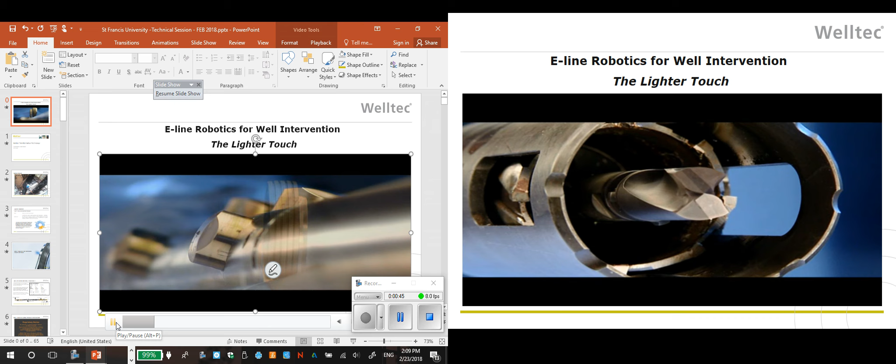So Welltec's a privately owned company. I don't really need it that much, I'll just move around a lot, they'll be able to see around me.

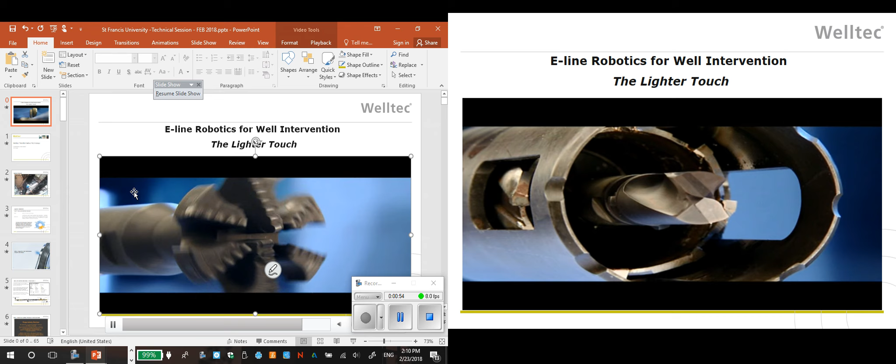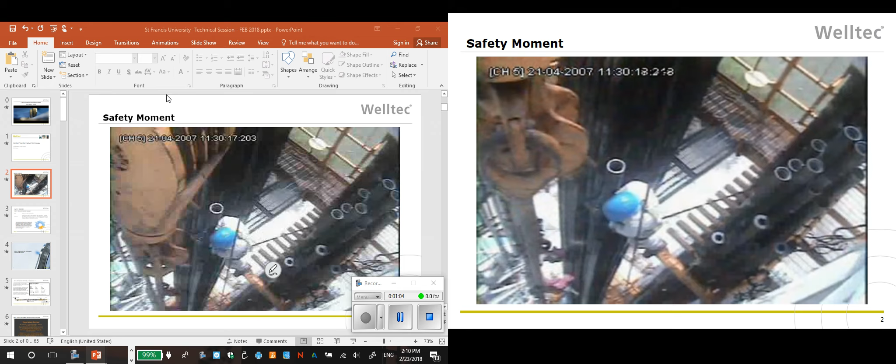Alright, so we like to start everything off with a safety moment. Essentially what this is showing is exactly what you never want to do. This guy was up on the monkey boards of a rig, he's not even using his lifting harness. He's literally on the verge of dying right there. He probably fell asleep from a long shift. Luckily he was not a big old boy like me, so he was able to hold on real tight to the traveling block there and not manage to fall to his death. He lived through this, by the way.

But the point of all this is that safety and environmentalism is paramount within the industry. Whenever you first go to work, wherever it is that you're going to end up working, the first thing you're going to do is undergo safety training.

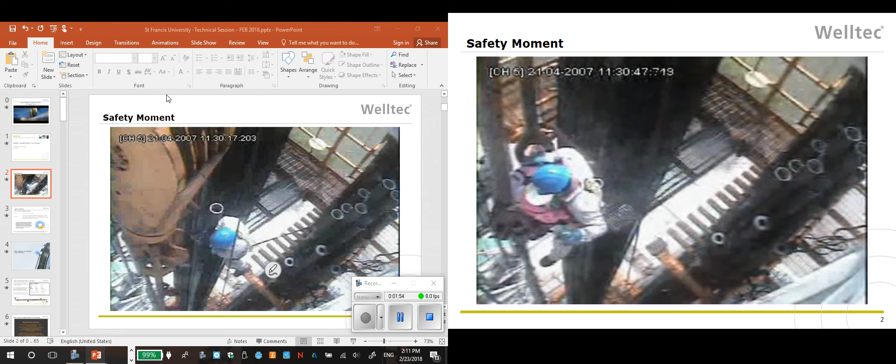I started out at one of the largest oil field companies in the world, Schlumberger. The first thing they do is they send you to a school and train you how to drive again, because car accidents, motor vehicle accidents, were the number one cause of death for all the employees worldwide.

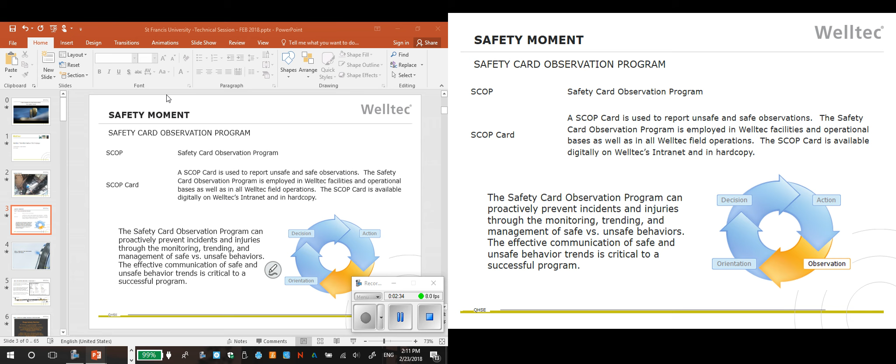So most companies have a safety program. The biggest trend in the industry is everything's a behavior-based safety program. So they don't want you to just make a checklist and check it off and say I did my safety checklist. They want you to modify your working lifestyle to be thinking in terms of safety, and it works, because all the safety principles are based on the fact that nobody ever thinks an accident's going to happen. That's why they're called accidents, and it's too late to be prepared once it does happen. It gets ingrained in you, and they want to develop a culture of safety within the industry.

The traditional way of doing things is you would take a 40-foot joint of pipe, put one pipe in the side of the other, push it down, put another 40-foot joint on, push it down, 40 feet at a time for up to 30,000 feet. It takes days.

Then people invented coil tubing. Coil tubing you can run in hole, it's a continuous reel of tubing that you can run in hole at 100, 200 feet per minute. That sped things up, but it's very heavy, with a lot of heavy lifting involved and a lot of fluids required.

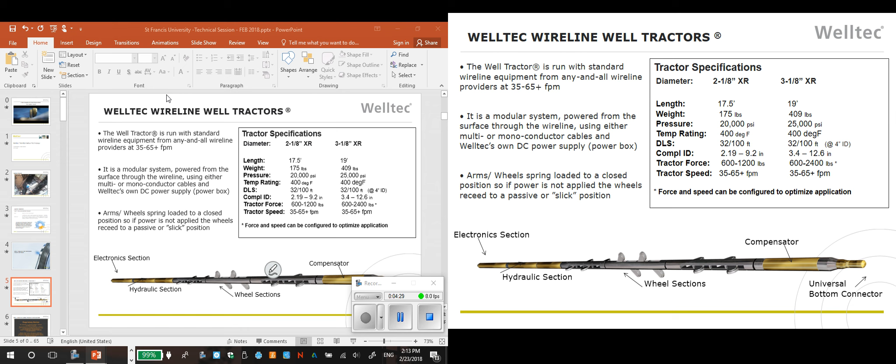And we attach the wireline tools at the end, and we push perforating guns, logging tools, microseismic arrays, pipe recovery tools, anything out into the lateral, all off a wireline. The advantage of that is it's safer, easier, faster, and usually more cost-effective than the old traditional way of doing things.

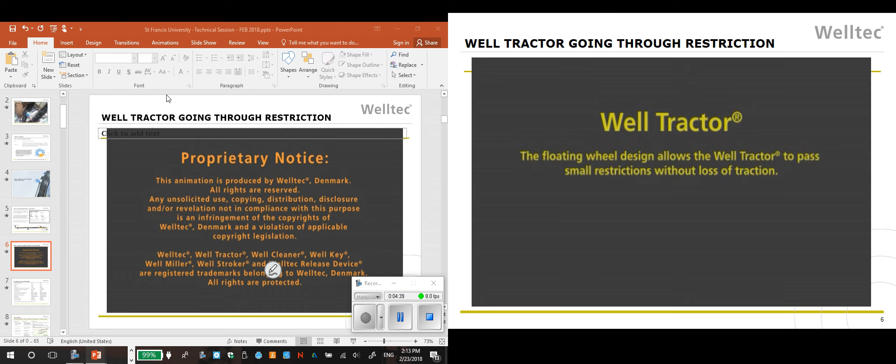This is a video that shows a well tractor, how it operates, going through a restriction in the well. The tool is designed so that if you have different size casings, patches in the well, any kind of anomaly, the tractor can navigate that and not get hung up, which is one of the largest issues in the industry, losing something in somebody's well. There's millions and millions of dollars on the line, and people tend to get very upset over these types of issues.

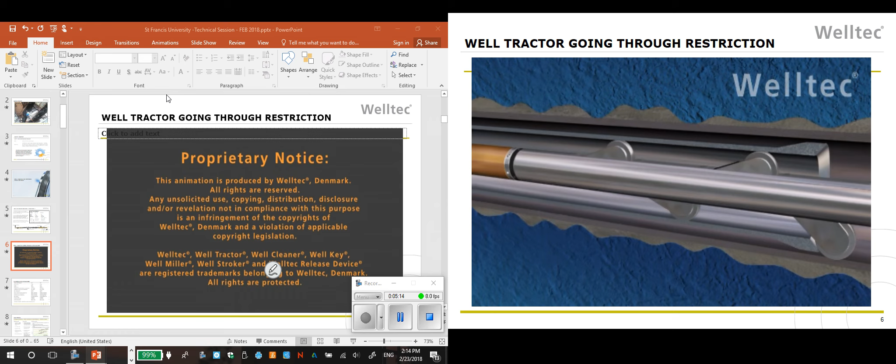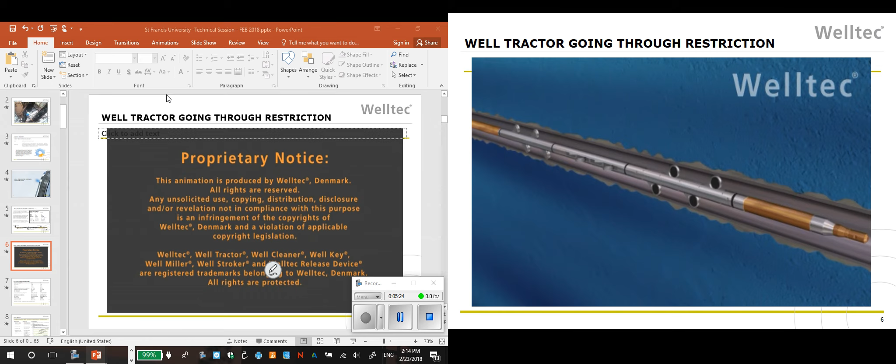So you lose something in the well, you've got to go fishing for it. It's not always that easy. If you work in the industry long enough, whether it's on a frac site, a drilling rig, or whatever the situation is, you are literally going to witness the impossible occur. It happens daily. It's never supposed to happen, it shouldn't happen, but we just saw it happen right here and now.

So these are the specifications for our newest generation of well tractor. We're owned by one guy in Copenhagen, Denmark. He's a geoscientist by training.

He was working offshore, helping people develop ways to pull these tubes, coil tubing uphill with fluid. He said there's got to be a way to do this off of this electric wire line. He created the robotic well tractor. Statoil saw it up front, gave him about $6 million of startup money and brought in a manufacturing firm. He developed it, and the first generation could only do about 20 feet per minute.

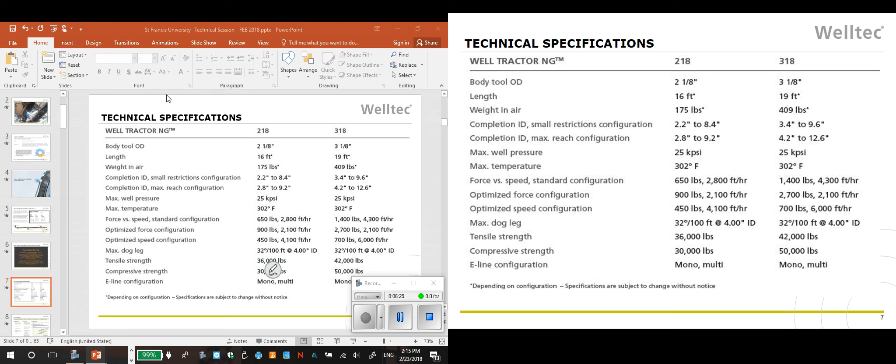We're on our third generation of well tractor right now. We can do around up to 70 feet per minute. Our newest generation, running in the North Sea right now going through its paces, is a little bit smaller and faster, and it can go up to 100 to 120 feet per minute, which is a pretty large step up, getting much more competitive with coil tubing and its speed.

This is a case story showing the largest, deepest well and the longest lateral we've been in locally in the Northeast. This is in the Utica well. It's just under a 24,000 foot well with an over 13,600 foot lateral. We conveyed 5 guns and a plug to the second stage in the well because they couldn't pump into that, and we conveyed it across the 13,000 foot lateral without issue.

As an industry, it used to be that people only drilled wells that were 12,500 feet deep with a 5,000 foot lateral. That's nothing anymore. Everybody's drilling out 18, 20, 25,000 feet. Right now in the Northeast, people are drilling 30,000 foot wells. Everybody's trying to beat Eclipse Resources and their longest wells ever drilled on land operations.

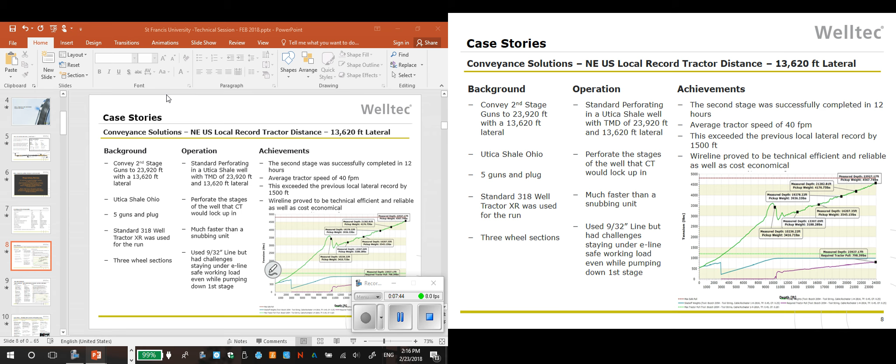So there are challenges involved, such as everybody uses 9/32 wire line. That is too light right now. As you get out to 25,000 feet, just the natural weight of the wire line and the tools itself, you're compromising the safe working load of that wire line. People are ultimately going to have to size up the size of the wire line.

But at any rate, the world record lateral distance for our technology, the well tractor, occurred in the United Arab Emirates. It was a well with a 19,596 foot lateral and a 27,700 foot MD, measured depth, the total distance that it goes. So we were able to convey a 136 foot long production logging tool string.

We did have to use a tandem tractor setup. Our standard tractor has one motor that can generate 1,000, 1,200, 1,400 pounds of pulling force. We can use a second motor to get more power and force out of that and generate up to 2,200 pounds of pulling force. A tandem well tractor was used on this to deliver those tools to that depth because you needed a larger wire line, 5/16 wire line, which is much larger and heavier.

This is a representation of drag modeling that we have. So we have a MATLAB-based drag model that basically forecasts how feasible the job is with our technology.

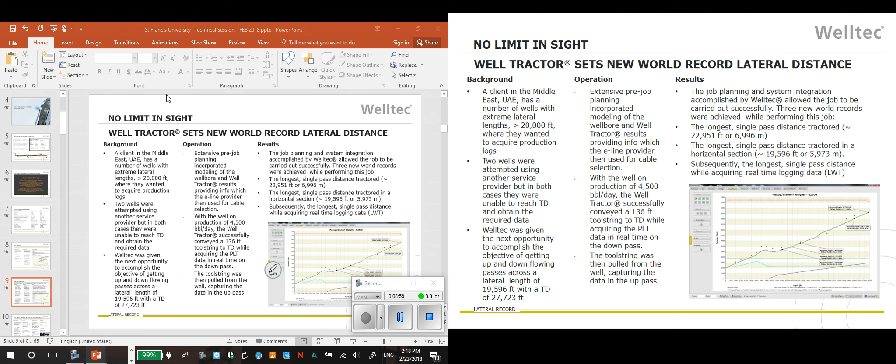Because the big thing within the industry is if you want to stay in business, you never show up on location and say, we can't do this job. That's impossible, we can't do it. They don't like to hear that. You wasted everyone's time and money. You'll never work for that company again for a long time.

So you have to be able to go out there. And even as a salesperson, one of the first things you learn as a sales guy is don't lie. Never lie. If you lie, they will never trust you again the rest of their life. You can have a great relationship with someone for 5 to 10 years, you tell them one lie and it's over, and they'll never trust you again. So the industry is all about transparency, being upfront.

If you can do the work, come out here and do it. If you can't do the work, don't jerk me around, tell me you can't do it. We'll find another way to do it, and nobody gets any hurt feelings. So that's why everybody has job modeling.

This particular operation was a classic situation of what's never supposed to happen. The simple mistake was this particular well operator got the names on their wells confused. One well is 20,000 feet deep, one's 17,000 feet deep. They named the one that's 17,000 feet deep as the one that's supposed to be 20,000 feet deep. They got it confused, and lo and behold, they go out and start fracturing this well.

After they start getting into the zipper frac on this well, they realize there's a problem. So we actually ran a camera logging tool to help determine it's just a naming convention issue - we're in a different well than we thought we were.

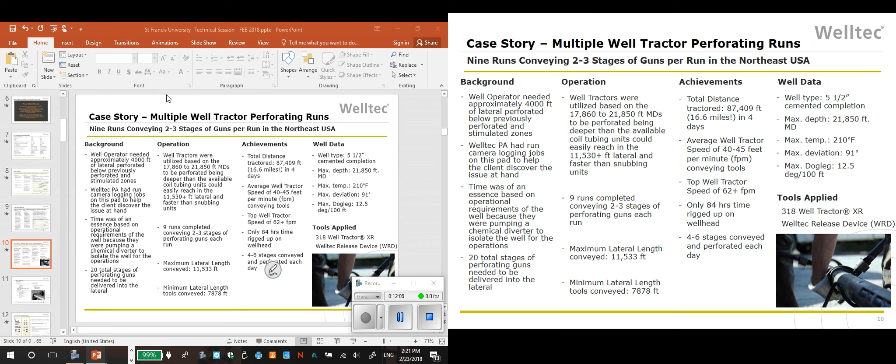We ran nine runs over the course of under 4 days, and it really only took 4 days because they had other operations going on between our runs. We conveyed 88,000 feet in the 9 runs, nearly 17 miles, in under 4 days. We could have easily done it in about 2 days for that distance. So it was all good, very impressive.

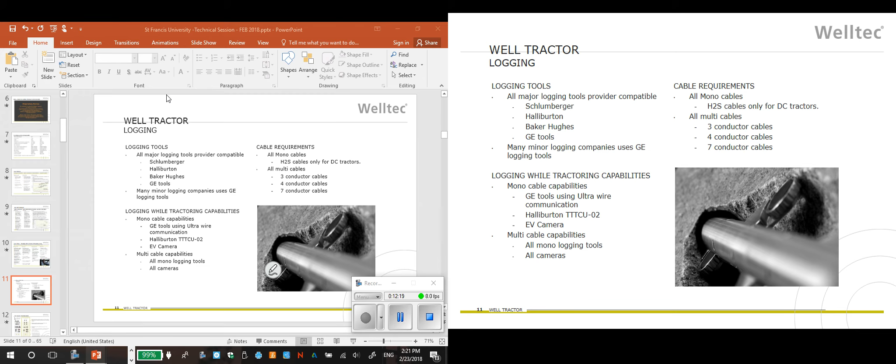Operations in general - whenever we were getting involved in this project, half of the engineers in the room for this operator were like, you guys are nuts, it's not going to work. It's just a tractor, good for 1 or 2 runs. I'm not sure we can go out here and make 10 or 12 runs. But we had done it before - we had some case stories, so it's not the first time.

The advantage of a tractor is, and it really is revolutionary technology - the owner of our company is forward thinking in every way. I was explaining this to the professors earlier - the guy who owns our company has been offered hundreds of millions of dollars to sell out by every major oil field service company you've ever heard of. He's laughed at them, refused it, and walked out the door because he's got other inventions.

This is our oldest technology we're talking about. The newest technology we have is even more revolutionary, and some of the stuff they don't even tell guys like me because they're very secretive about their technology.

But the value proposition is that a coiled tubing unit is a very large, heavy piece of equipment. We deliver our equipment on one pickup truck with a tow-behind generator. The tool weighs around 400 pounds, 17 feet long. So you need a wireline truck and a pickup truck, that's it.

A coiled tubing unit is a semi with a giant spool of coiled tubing the size of half of this room - a drum 10 feet in diameter, wrapped with 30,000 pounds of coiled tubing or more. So you have that semi plus 3 other support semis. To get coiled tubing out on location you're talking 4 semis, a huge footprint on location. We can do the same work off of a pickup truck and wireline unit, so that's very advantageous for various different reasons.

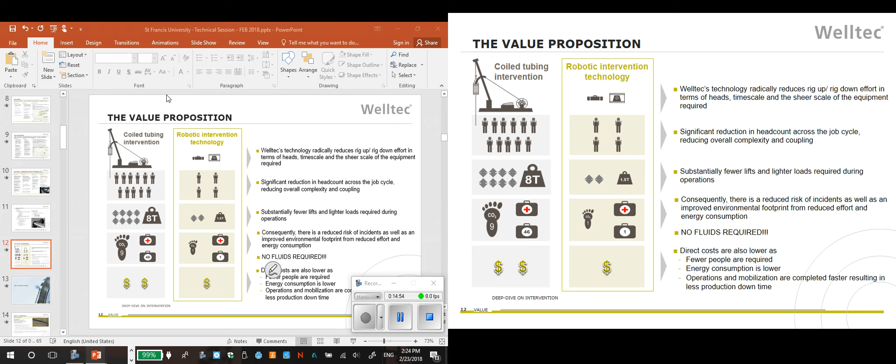We require zero water to do our operations. When you're doing a coiled tubing operation, you're using sometimes millions of gallons of water to clean out a well. We can go clean out the same amount of debris using zero water.

And that's where we're getting into the cleaning tools. This is a representation of our power suction tool, the PST tool. Basically, the way it works out is, if you've ever worked around any oilfield stuff, there are things called cement dump bailers where you run in and dump stuff out of the tool into the well. This works opposite.

We have a pump inside the tool. It creates a vacuum, a Venturi effect, circulating fluid through that tool, and we suction debris into our tool, and then we can hold it in there.

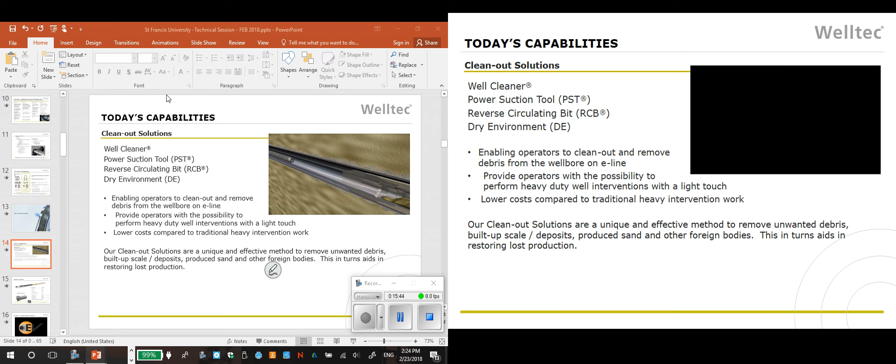This is an advantage—it's a small volume cleaning solution, but it's an advantage over some operations because we can deliver the material directly back to the surface. We have tools that have a bit on the end like this that can mill and vacuum-suction the debris in. This is all very small volume cleaning work.

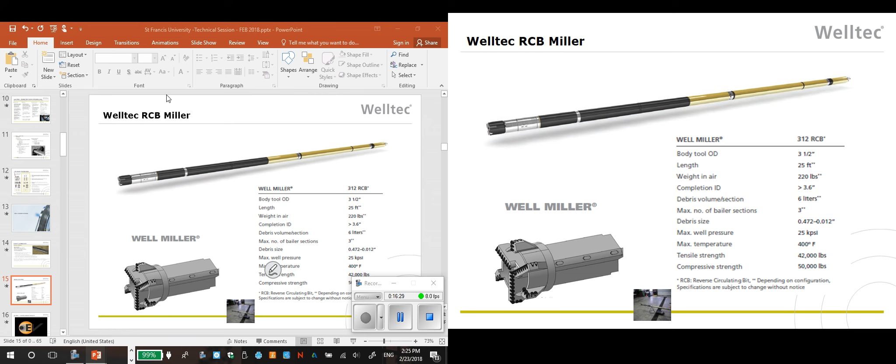Now, this is where the nuance comes in. We can't go out and do everything coil tubing and these other heavier weight operations do. We're never going to claim that we can. We can't go out and effectively clean 1,500 feet of sand in a lateral—it's going to take a long time. So in those operations, coil tubing, or stick pipe as they call it, just regular tubing, is generally much more beneficial. But the next video shows a slide of a well that was cleaned out with coil tubing.

So we'll see if we can get the volume going here. The wellbore fluids were a mix of produced oil, produced water, and frac water. So let me...

Yes, so this was a well that was cleaned with coil tubing. This was a camera run on coil tubing after coil tubing had already cleaned the well, and you can see that there's a great deal of debris still left in the well.

Our technology has the option to clean a lot of this out, because it's really funny—you have coil tubing guys who are like, okay, I'm going to go out there, use coil tubing, and make your well squeaky clean. There's not going to be a drop of dirt left in your well, that's what a coil tubing salesman will tell somebody.

And then, interestingly enough, two days later, the exact same coil tubing salesman will tell somebody, we couldn't possibly pump enough rate through our coil tubing to clean everything out of the well. That's why there's still stuff there. So at any rate, what you find is that everything's not an exact science. There's limitations to what everything can do.

For example, a coil tubing unit is only 2 inches in diameter—the ID is actually going to be like 1 3/4 inches or so. So you can't pump enough fluid through there fast enough to bring everything back up out of the well. You're going to have something left in the well.

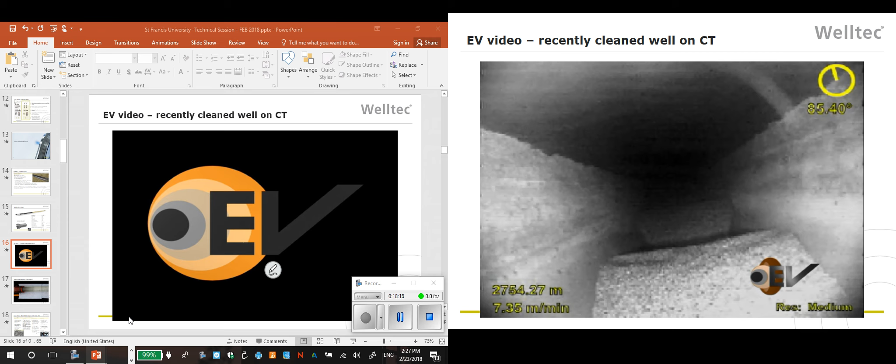But our tool—the next video is a test loop of ours done in Norway. If anybody speaks Norwegian, let me know what these guys are saying. It shows the power of our tool, vacuum suctioning. Basically, we did this to prove to clients that it works.

They put a bunch of gravel, rocks, all kinds of stuff in the bottom of this test loop. We've got our tool going through—some of these rocks are 1 inch, 1.5 inches in diameter. We just vacuum-suction it up in there.

They were saying stop there. I figured that one out, by the way.

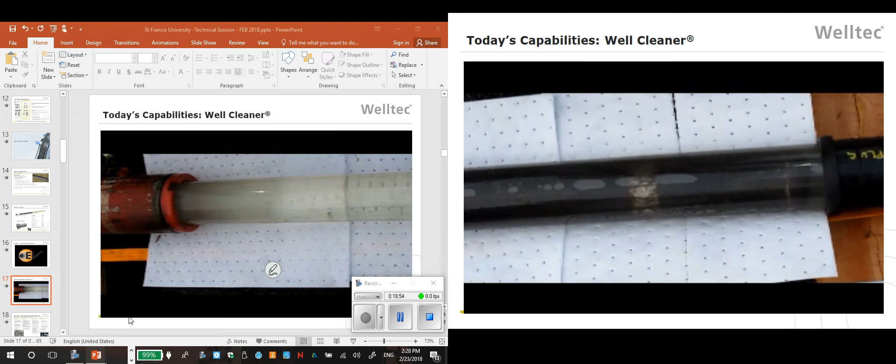Interestingly enough, this is one of the technologies that when I first started working for Welltec in 2010, selling in the Pittsburgh area, I had people tell me, you're nuts. There's no way on earth we would ever use that. And that lasted until about 4 years ago.

When people first started drilling out past 18,000 feet over in the Utica Shale, for whatever reason, they designed a well in such a way they were counting on the toe sleeve and a pressure actuated toe sleeve to be able to pump tools down. Because as you guys have probably been told, until the well's open and you can start pumping stuff down, you're limited. You have to push it down with coil tubing or pipe or whatever, right?

So at any rate, this particular operator, the toe sleeve didn't open, they couldn't get tools down. Coil tubing couldn't get through the lateral length and the depth. It would just lock up and never get there. A snubbing unit would be very expensive, take a long time, this type of thing. So we were the primary contingency and we were able to go in.

First well, we just ran in with our well tractor. We shot the guns on the first stage. Everybody's happy. They're able to pump in later, start to frack. The second well, we tagged cement, junk cement, 4,000 feet high in the lateral.

We pulled back out, ran back in with our milling tool, and in one run with the milling tool, we were able to clear 3,000 lateral feet. Now that doesn't mean that we cleaned 3,000 solid feet of cement into our little tiny tool. That's impossible. But what you find is sometimes you just have a hump.

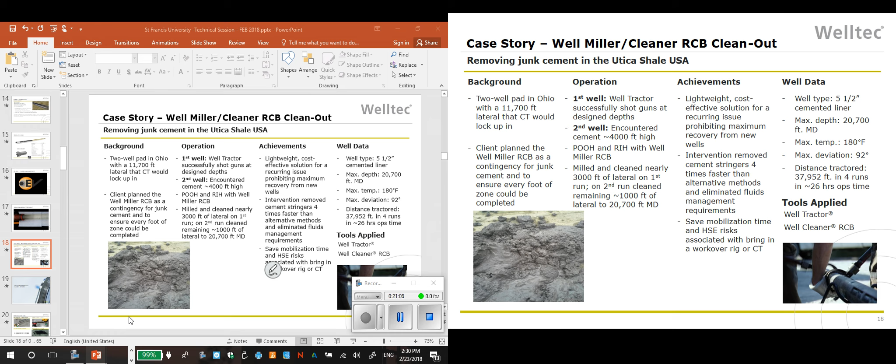If you did the same amount of runs with a snub unit or a stick pipe, as they call it, it would feasibly take you 4 days. And we were able to do it in just over 1 day. So they were thrilled about it. We were able to reduce their operations. So something that's really going to be working out here and has kind of a local effect to it

is we also have what we call a dry environment cleaning tool, meaning that the vacuum suction tools I've shown you at this point, it needs a pipe full of fluid to create the vacuum suctioning effect to pull the debris in, right? There are a lot of dry gas wells out there that have zero fluid in them, and they don't want any fluid on them, right?

As a matter of fact, up in northeastern PA, they have these old dry gas wells that were horizontal wells drilled from 2008 to 2012 time period. They want to clean those out to get the produced sand and scale out of them and get more production out of them. It doesn't make a difference how much fluid they pump into it.

The formation is going to take every drop of fluid, and they're never going to get anything come back to the surface. They could pump a bazillion barrels of fluid into that. It's going to take it all, but they still want to clean it. So we, luckily enough, have a mechanical solution that can go in and mechanically clean all this produced sand and scale out with zero water, all right?

So one of the biggest concerns that people have whenever you're dealing with urban drilling like you have around Pittsburgh and things like that, right? It's one thing whenever you're drilling a well 1,000 miles out in the middle of the desert and there's nobody around to see it. It's another thing when you're driving right through everybody's farm and backyard and all that stuff, right? So we reduced the heavy vehicle traffic.

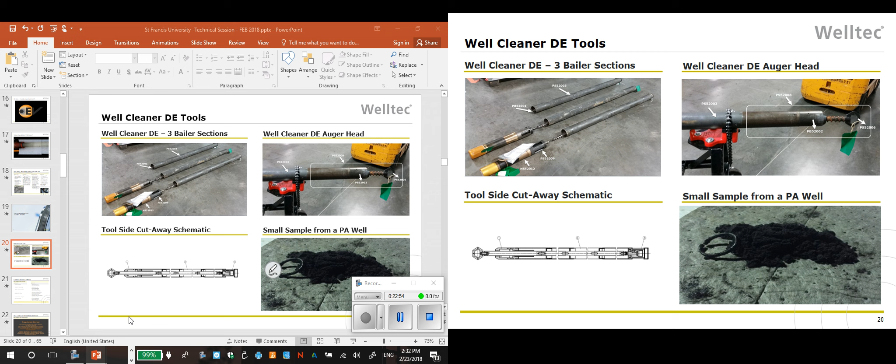So we're able to go up to northeastern PA, clean this produced sand. We also find O-rings and rubber gaskets and parts of plugs and things left over from the frack in there. And we mechanically clean this sand and produced shale back out of the well, saving them millions of barrels of water, all the heavy vehicle traffic, the cost, the risk associated with it, which is a big deal.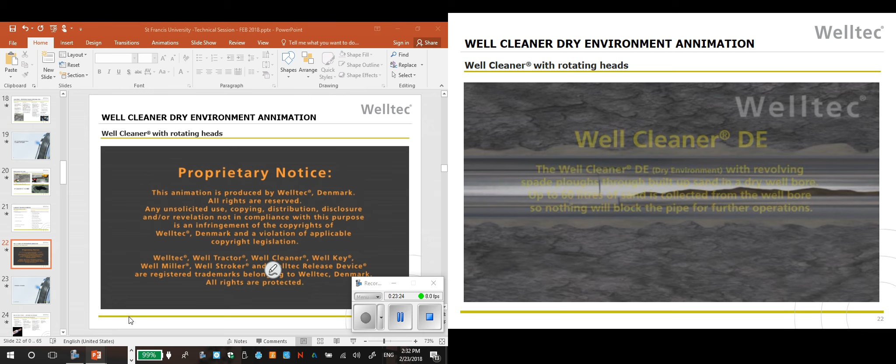This is something we got into just last year, and it all came up by accident. I was at the client's office in Pittsburgh. We were talking about something completely different, and they were explaining to me they have this problem. And I said, hey, this problem you have, not being able to circulate fluid back to the surface, we've got a mechanical solution for it.

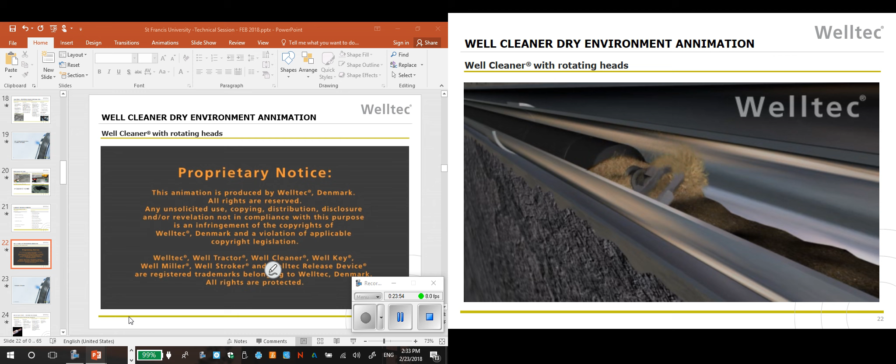It segued into us helping them save millions of barrels of water and heavy traffic and all this. We'll ultimately write an SPE paper about it.

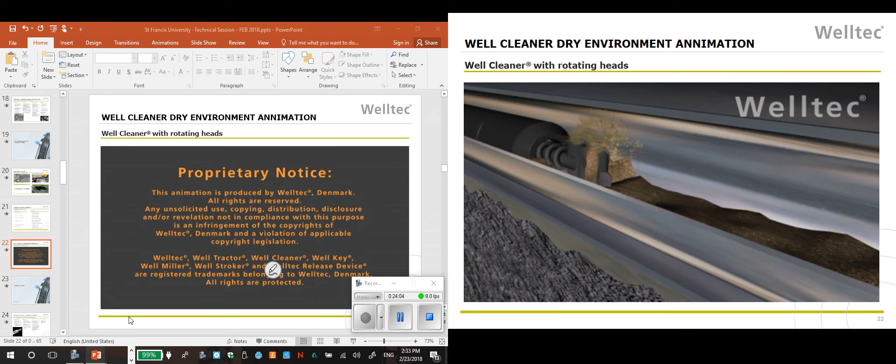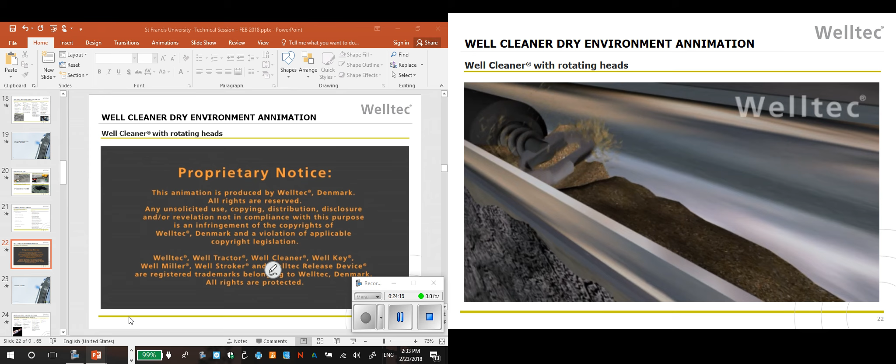We went back and made some design modifications for our tool. This is the way the tool was originally driven—it had this paddle system and auger, and it worked. It was effective, but we all wanted a little bit more out of it. So we redesigned the front end of the tool, and that's where the mechanical engineering experience came in, to work with the client and custom redesign the front end to best suit the particular operation.

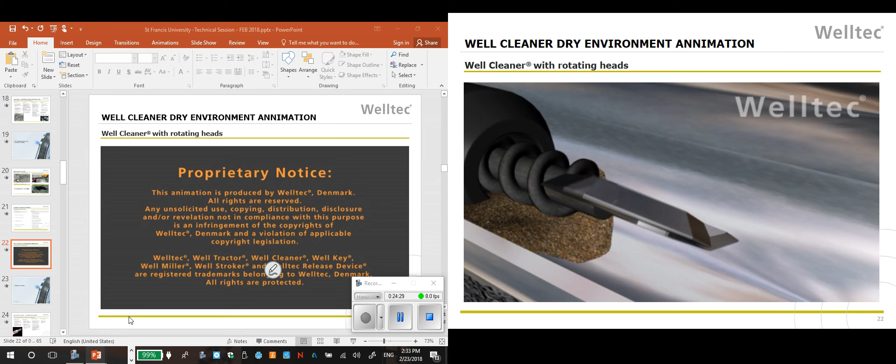That's one of the coolest things about working for a small company like Welltec—our owner has his little mad scientist manufacturing facility off to the side of all the main manufacturing facilities in Denmark. And we custom build tools regularly.

So people come to us with a problem. They say, we've got this problem, we want zero explosives on our platform because there's a bunch of pressure, we're afraid something's going to blow up. We create a solution that's all mechanical, no explosives involved. So we can also go in and fish.

Fishing is a very big deal, as mentioned. If you lose something down in somebody's well, millions of dollars are on the line, and they want to get it out. People lose everything from bolts, gloves, pipe wrenches. Our tools occasionally get pulled off, the wire line breaks, and then you have to go fishing for the tool.

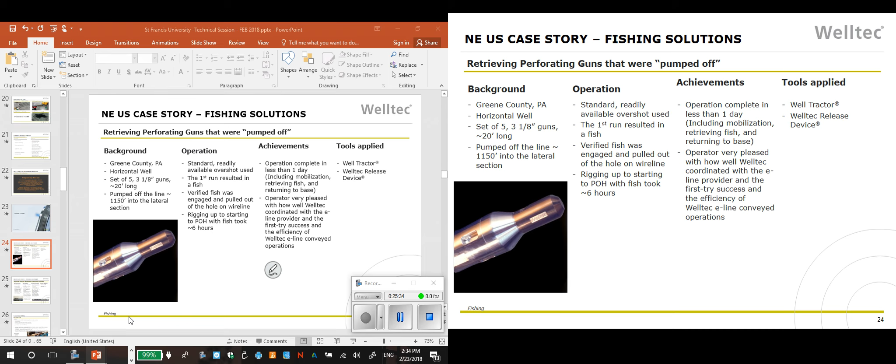We can actually fish our own tools, but we can also fish perforating guns. We've been able to fish perforating guns out of the well, tractor in, latch into those, and pull them out much more quickly than some other operations. If you were to do that on stick pipe, it would be a much more involved process.

They lost it. Now some people just say, I'm leaving it down there, we'll pump it down to the bottom of the well and forget about it. But Shell's not one of those companies. They decided they wanted to get this out. You would typically try to pump a tool down to latch into it, but they couldn't do that in this case because they were running these flow-through plugs—if they pumped this back through the flow-through plug, they would never get it out.

Kind of a long story, maybe too many details to get into. But at any rate, we were able to go in and use an electromagnetic fishing tool to tractor in and latch into this little tiny tool with a coiled tubing unit. If you touch this with a coiled tubing unit, you're not even going to notice it—you'll never notice that it's attached whatsoever. We're able to get a slight tension response, and surprisingly enough, we were able to pull this out in one run.

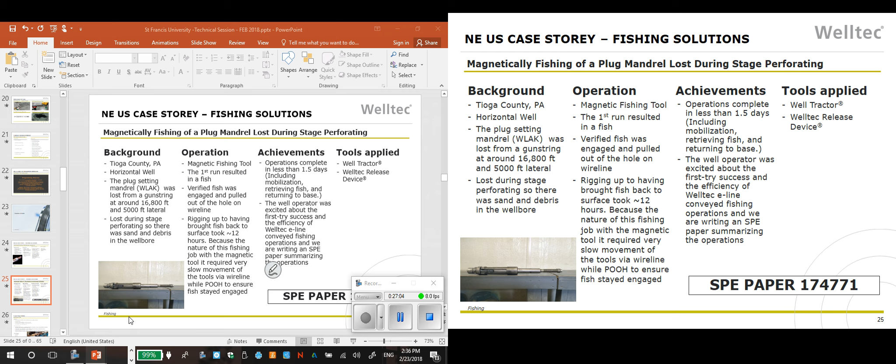So we tractored in, latched into it, and pulled it out in one run, going very slowly, around 30 to 50 feet per minute on the way out. If you would have asked us beforehand, we would have said it would take at least 3 runs. We were able to do it in the first run. Pretty cool SPE paper about it.

Now, we've won different awards, specifically with this event called ICOTA, the Intervention and Coiled Tubing Association. We've won a bunch of awards for them, specifically for the well cutter tool.

This is one of those custom designed tools. Somebody came to us, they wanted to cut a bunch of pipe on an offshore platform in Russia. They wanted zero explosives on the platform.

We created a way to do it, because ordinarily the way you cut pipe is you just put a shape charge in there and blow it in half using explosives. It's the easiest, fastest, simplest way to do it. Been doing it for decades, right? But it's a very violent process, very risky, and does damage to the steel. So we created the well cutter tool.

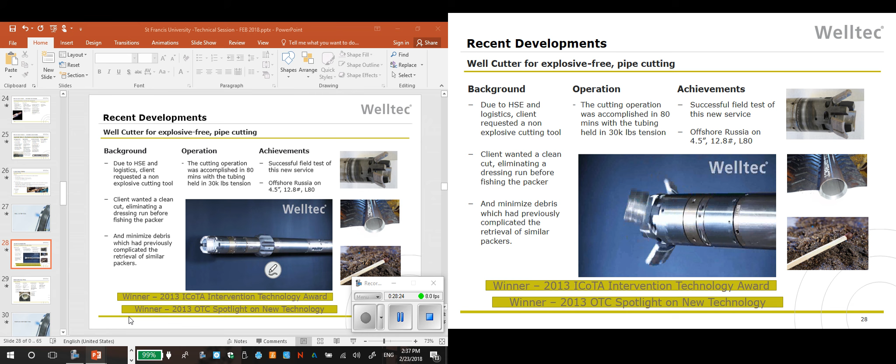So it centralizes itself in the pipe. Then these arms come out, and this is like a special composite alloy that's diamond embedded, some kind of secret something, right? That basically comes out and grinds the steel in half.

The driller's like this because whenever you use explosives and just blow the pipe in half, it leaves an uneven, jagged edge with bubbles, and it's very irregular in shape. So when they go back in to try and latch onto that and pull it back out, they can't latch onto it easily because of all these irregularities. So whenever we're finished cutting, it's a nice, smooth finish like that. And people like that because it makes it easier to fish.

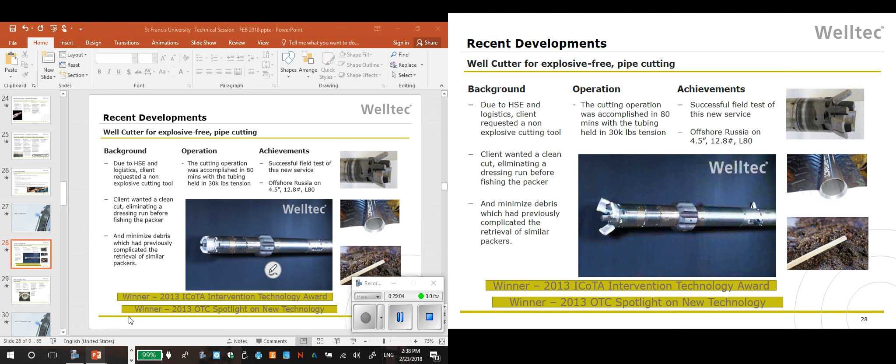And there's no explosives used. We can cut through solid steel pipe that's an inch and a half, or half an inch in thickness, in as little as 10, 15 minutes on the easy end. On the harder, denser steels, it might take 35 to 45 minutes. But we can cut through it. We can make multiple cuts.

We've also developed a little drill bit. You can just drill holes in the casing to alleviate pressure and stuff like that.

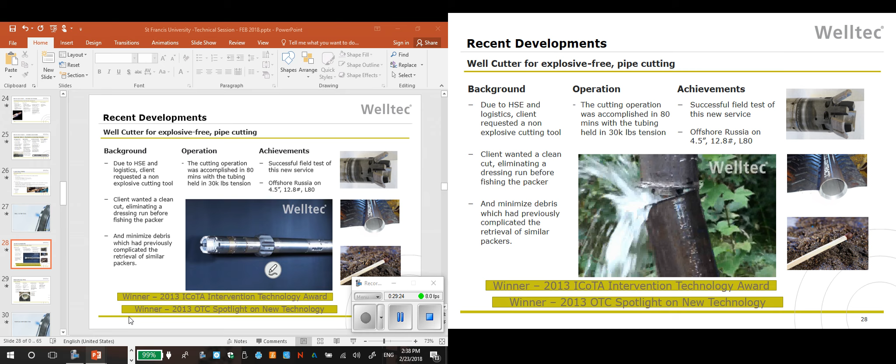So this slide just shows a demonstration of what we managed to cut. It's one thing to say you go in and cut a piece of casing in half. Casing is just steel pipe, so a lot of people can say they cut a steel pipe in half. But we're able to use this technology to cut what's called a packer in half, which is basically multiple layers of steel, rubber, all kinds of stuff. So we're able to make cuts at some of the biggest sections of the packer, which is not that easy to do.

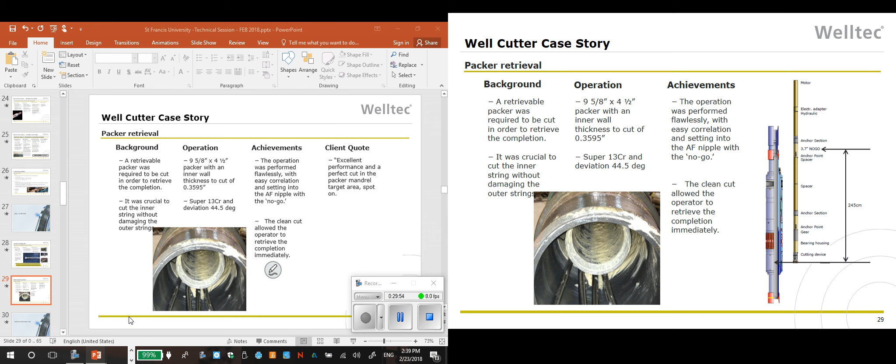And then interestingly enough, we're getting into something called a Torcplug, which is another ICOTA award-winning technology. We've won at least 5 different awards.

This is a mechanical resettable plug. As mentioned, usually you have a plug that uses explosives to set itself. So you have a little explosive charge, it strokes a mandrel, expands this plug out and sets in the casing. It's there forever until you drill it out. There are some ways to mechanically reset them, but it takes a lot of doing.

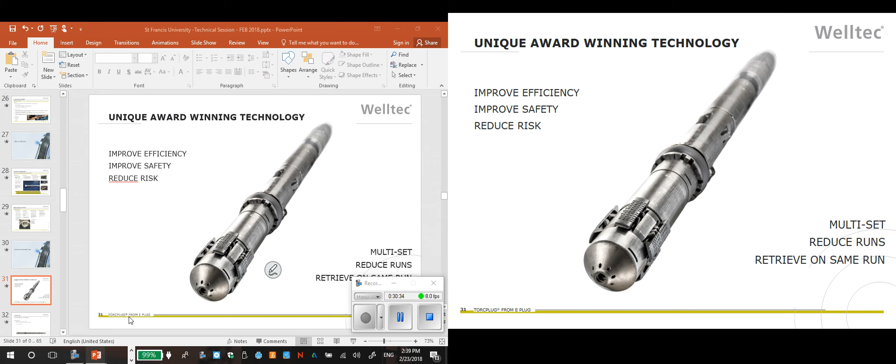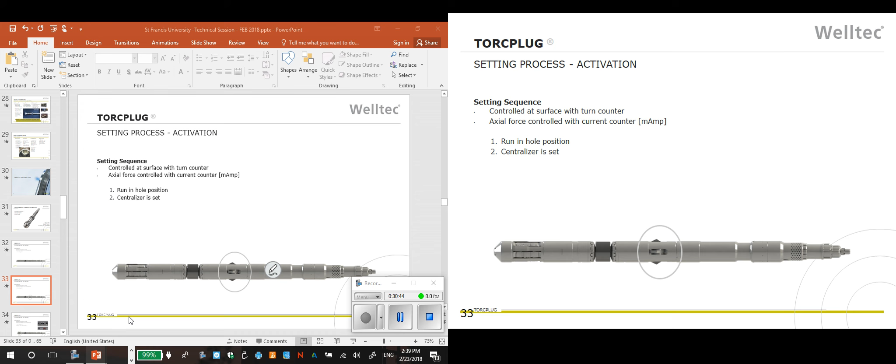So we've created a way to do it off a wireline, mechanically. This is what it looks like running in the well. So then it centralizes itself, sets some slips, and then it has some anti-extrusion devices here. This prevents this packer from getting over-smashed too much and not being effective. So this kind of isolates it.

This is unique because these are all spring-loaded. There are 10 different sections around the diameter, so you can do this in elliptical shaped casing, any kind of deformed casing. Because guess what? One of the first things you learn in mechanical engineering, which is my background, is that steel bends. You're not going to take 30,000 feet of steel and have it be perfectly straight and rigid. It's going to bend, it's going to torque.

So as they're running casing in the ground around these curves and bends and shape changes within the well, it gets torqued, bent, sometimes cracked, creased, all this stuff. So we can set in irregular shaped casings.

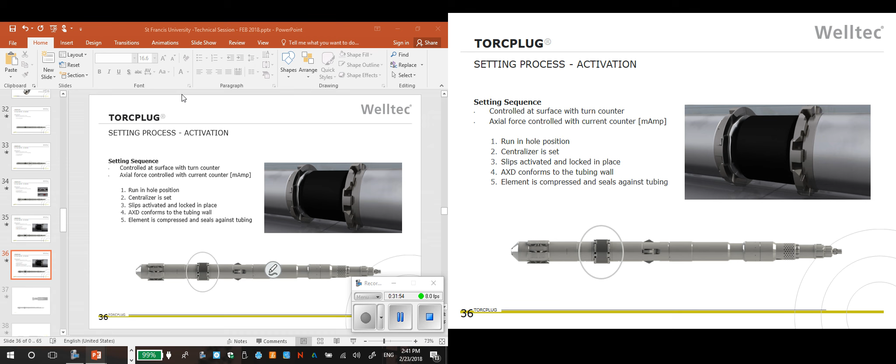And essentially the way this works, and why it's called a TorcPlug, is it's a screw, right? So basically...

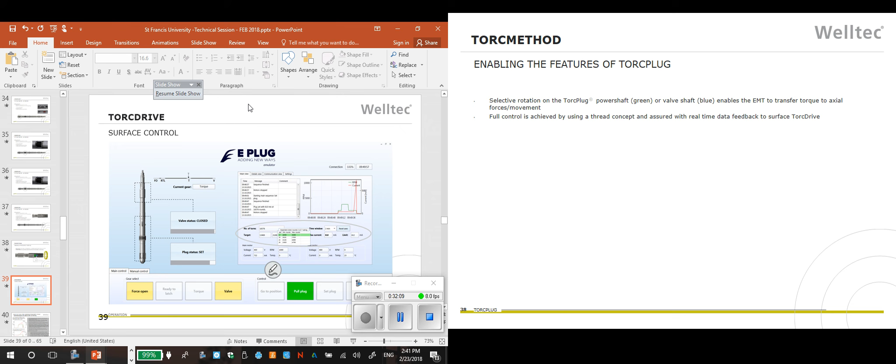Yeah, some of the animations aren't coming up here, but that's fine. No, here it is. There's the problem.

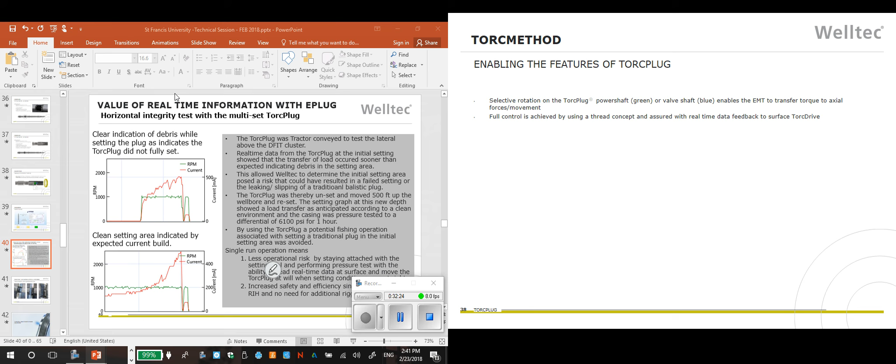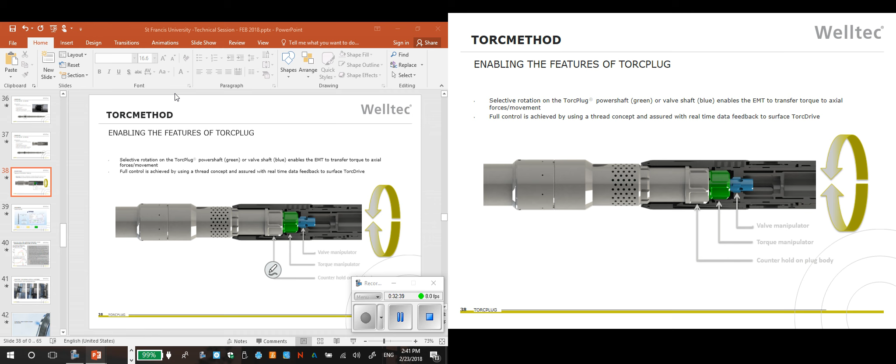Okay, so you literally use a screw to force this packer to expand and seal itself. The advantage of using a screw is you're telling the plug, by its own software, what it's being set in. So you're telling it you're setting in 5.5-inch casing of this weight and size, so it knows how many revolutions it's supposed to turn before it's set. Which is not something a regular ballistic plug does. You set off the charge, you hope that it's set, and then you find out later.

With this one, which was actually discovered here in the Northeast U.S. over in Ohio in the Utica Shale, we determined that one of the benefits of this mechanical resettable plug is because you're counting the number of revolutions it takes to set inside that casing, you know whether or not it's set prematurely, set fully, or didn't set at all.

So in this particular well, the operator had done some DFIT perforating. Basically, they were pressure testing the well to design their frac. They were getting pressure responses they really didn't expect, so they were worried maybe there was a big split in the casing and the well bore was compromised, which is a big deal, state regulatory issues, stuff like that. So they wanted to pressure test it. Ordinarily, you would just set a bunch of plugs or take all kinds of trips, a lot of time.

We're able to go in and do it quickly, effectively. We're able to set the plug, and the first response was that it was clear the plug didn't set. We were able to communicate to the client that the plug didn't properly set, and we're not going to get an adequate pressure test. What do you want to do?

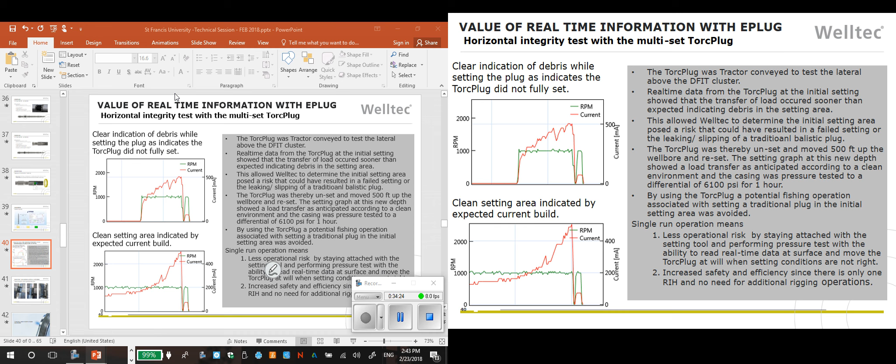The decision was made to pull up 500 feet and reset it. We're able to positively determine it sets, and then go in and pressure test the well for more than an hour, which is all state regulations. The state requires the well be pressure tested for at least a half an hour, although it does vary from state to state, place to place, area to area. But all of those are required.

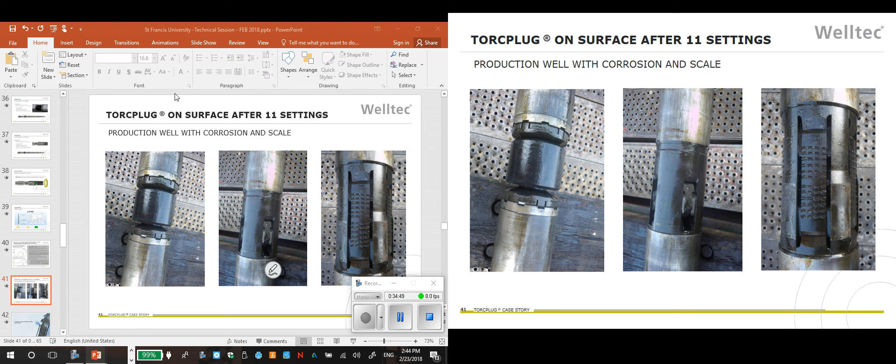This is what the TorcPlug looks like after it's been set in the well 11 times, which, as mentioned, most plugs are just used once and that's it. Then you either have to redress it or drill it out and it's useless.

Getting into some of the more interesting stuff we're working on is the Flex-Well technology. This is what the owner of our company really wants to get into. This idea of making multiple lateral completions isn't a new idea, but we're creating the hardware to make multiple lateral completions feasible.

Well operators like that for a few different reasons. One reason is it saves them money. Taking down a forest to make a 5-acre well pad costs a certain amount of money to do that, and there's a certain amount of risk with state regulatory agencies. If you cause some kind of spill and the EPA has to get involved, nobody likes that. So just like it used to be all vertical wells and you'd have hundreds of wells to degas one area, now it's all horizontal wells, and one well can degas the whole area, saving footprint.

Now we're talking about the option where you can drill a well, and the main horizontal is in the Marcellus formation, but then you can kick off the side of that and also put another horizontal off the same well bore down into the Utica, or vice versa. The key is the secondary lateral has to be small enough. The completion for that has to be small enough to fit in the first pipe, so it has to be smaller.

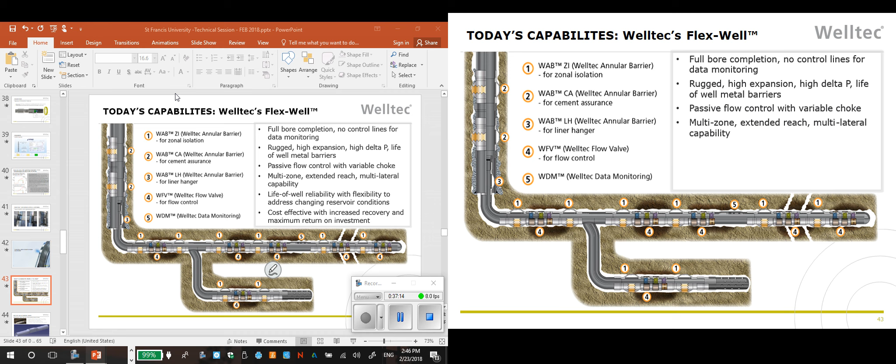So including what we call the Welltec Data Monitoring. The Welltec Data Monitoring was originally created - we've got a solid stainless steel packer system that replaces what people usually use rubber to do. I don't really have time in this presentation to get into the full details, but we created a wireless battery-powered temperature and pressure gauge for quality control, basically to prove that our packer worked. But over the years, people have been trying to run fiber optic cable on the outside of their casing.

Because they want to get pressure and temperature data over the lifetime of the well, right? Well, believe it or not, it's not really that easy to run fiber optic cable on the outside of a joint of casing in a 25,000 foot well. They put all these clamps and use air hammers to try to clamp it on there. They all break. It ends up wrapped around the casing, broken in half. People accidentally shoot it in half, because as you're perforating the well, opening it up to get the oil and

gas out, you just shot your fiber optic line in half, and you just wasted $2 million on fiber optic line, right? So we created a short joint that's a wireless battery powered sensor that goes on a little tiny joint of pipe. You screw it in between two joints of casing, right?

There's two benefits to this. You don't have any control lines on the outside that risk the cement job, causing an annular area where gas can migrate to the surface and cause an explosion or environmental disaster, right?

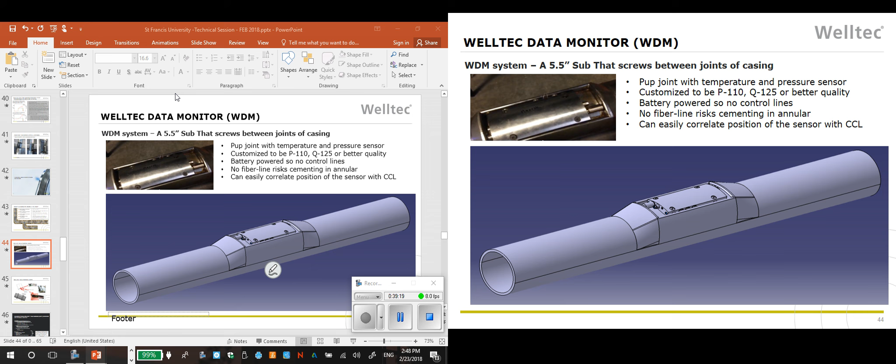So anyway, this particular technology, which is new, has only come out with us in the past 12 months, can go in and feasibly alleviate a lot of the risks associated with running fiber optics, but still being able to get temperature and pressure data, right?

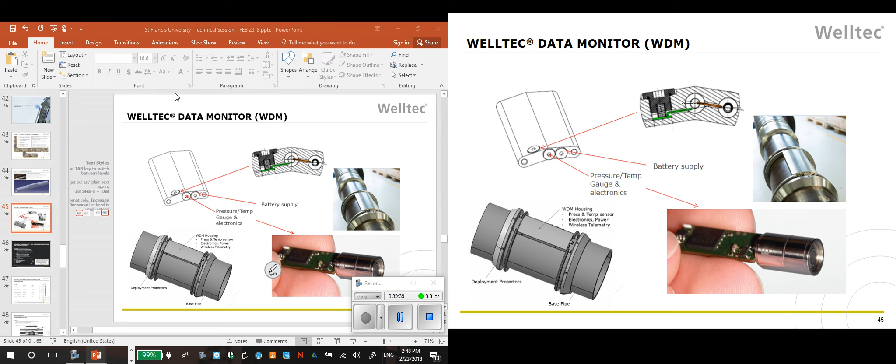This is just what the sensors look like. Nothing spectacular. Some pretty simple electronics. You'd be surprised how simplistic the electronics are out there in the world, folks. I mean, seriously, everything's a voltage and current response. It doesn't make a difference how sophisticated a piece of electronics you're talking about, whether it's this computer, some jet, space shuttle, or an oil field service tool, everything's just driven off of simple voltage current response.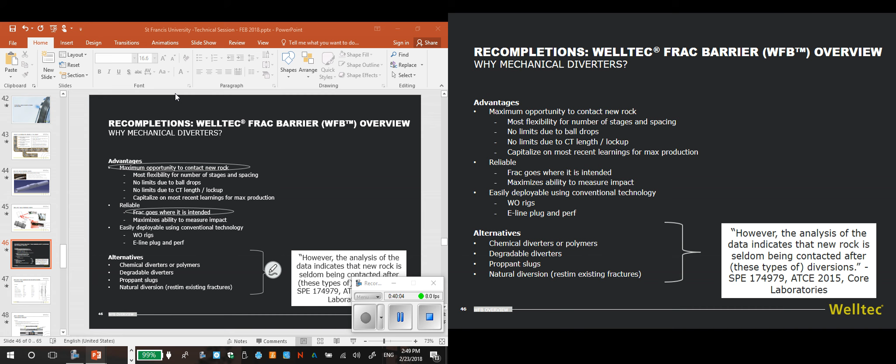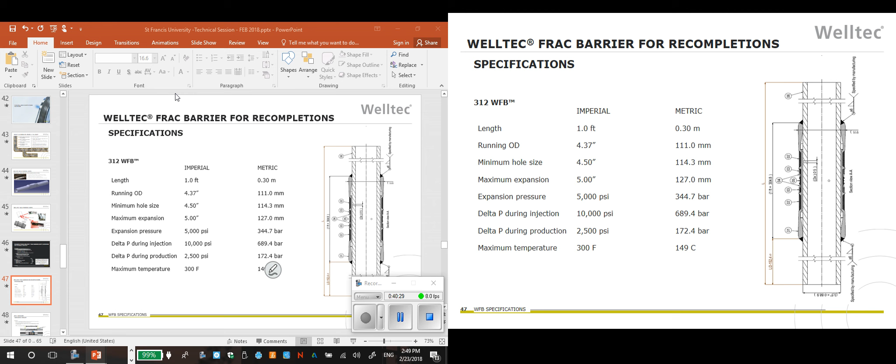So what we're going to talk about now is something that's always near and dear to Welltec, and that is innovative solutions, transforming the industry, and keeping environmentalism in mind, right? So basically, we've created what we call the Welltec frac barrier, which is only a foot long. It's a little short, hollow steel packer system that's related to the large packer system we have. But essentially, the point of this technology is the ability to allow an operator to go in and recycle a

well, right? So basically, what a frac barrier is, you have a standard well. This is the cement, this is the casing for a 5.5-inch well, which they're all over, right? Back in 2010, the frac designs, the well designs were completely different than they are today. They had much larger spacing. They would space out each frac stage as much as 500 feet. Now they're doing it every 125 feet.

So in all these old wells, you have 400 feet of rock that's never been produced, right? Now, of course, some of the gas and pressure has been taken off of that as other zones were produced or other stages were produced, but you literally have untouched, unproduced rock that you can go back in and target. It's not that easy, right? So we've created a way to do it. Our way is a lot better because a lot of people use chemical diverters. You can just blow past them and all this.

So anyway, what we're working on now is cold work steel technology. Cold work steel is basically, you don't have to heat it up beyond 800 degrees to get it to work. So we created a packer system. We run 3.5-inch tubing in. We've got this solid steel packer system, has a port open to it, right? We run in with 3.5-inch tubing, and with a common pump from the surface, you're able to go in, pressure up, and cold work that steel and expand it to inside the casing, right?

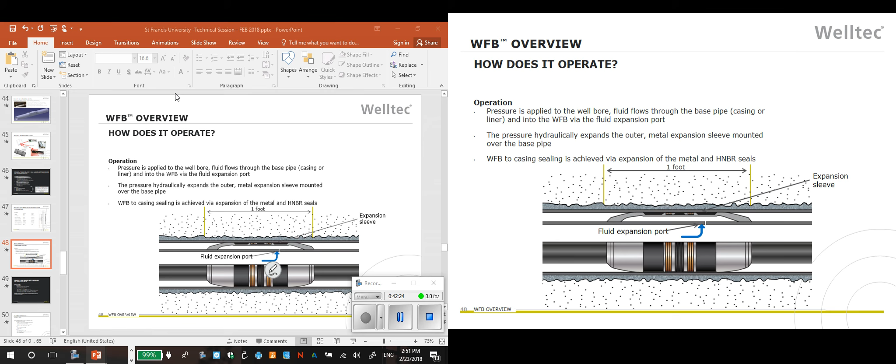And the rest of the slides kind of go through the process. I mean, essentially, this would be the schematic. I can get that to come up. Yeah, here we go. So the old well would be a 5-stage well. You have 5 stages in the lateral, but they're all spaced out a couple hundred feet, and you want to go back in and target more rock.

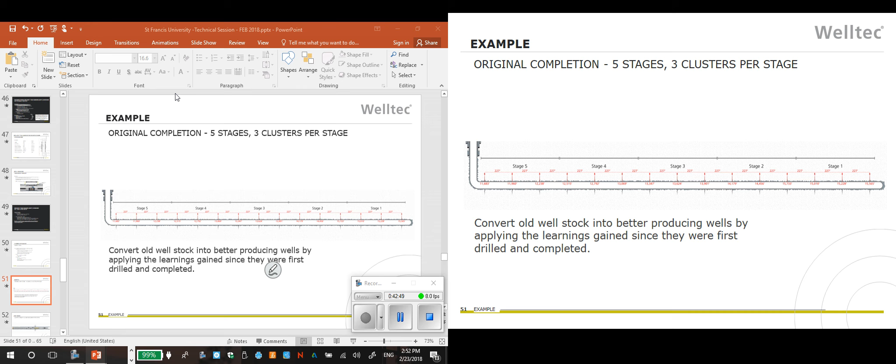So you basically can go in off a wire line, map out where your old zones are, go back in and perforate. I don't have time to get into the details, but in essence, where you had one stage in the old well covering that much distance, now you're going to put 3 different stages in there, shooting to try and get 3 times as much production out of what used to be one area of production.

And the idea is to go into the older wells and target rock that's never been produced, but it's there. That way you don't have to destroy more forest to get more production by building another well pad, with all the risks associated with that and things like that. You can go back in, recycle your old well, and save time, money, and risk.

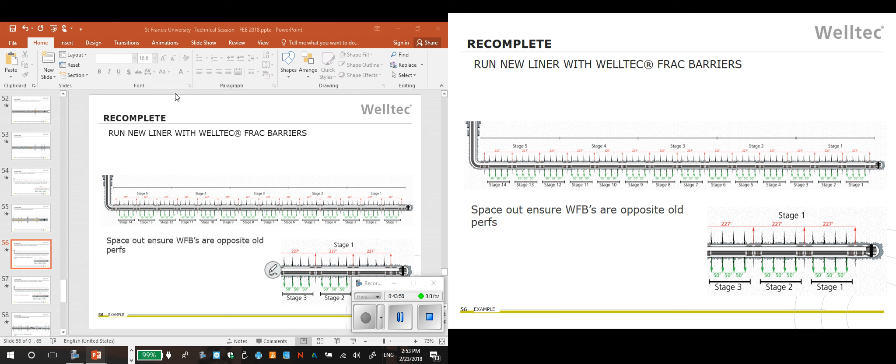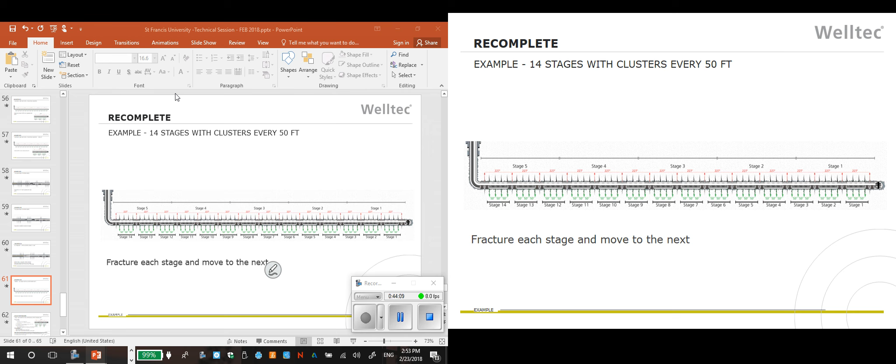So essentially, there's a whole process where you can run in with the tubing, and in stages, you're using our packer system to isolate the oldest stages. You expand them all at once, then you go back in and recomplete the well. It's probably a little beyond the scope of this presentation, but it's basically creating a brand new well where you go back in and recomplete it the same way you ordinarily would.

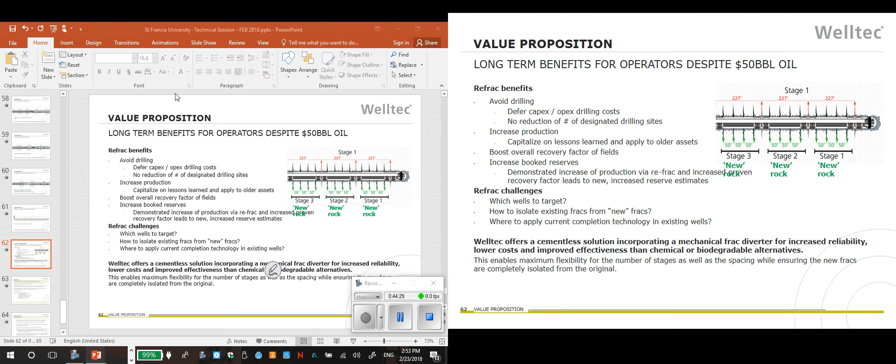The benefit of this is that you defer the capital expense and operating expense of drilling new wells and locations. You're able to boost overall recovery of the field, and the key is that you can get more out of your old assets.

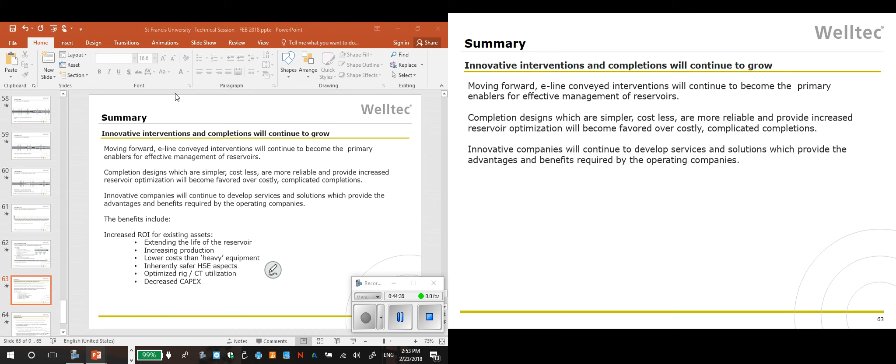And the summary is that moving forward, E-line conveyed interventions will continue to become a much more predominant part of the business.

As mentioned, I've been selling for Welltec for 8 years, and I used to be told I was nuts. Now we've worked with everyone. You name an oil and gas operator in the northeastern U.S., we've done at least one job for them. Some more than others, some are still a little more resistant or set in their ways, but we've gone out there and worked with everyone.

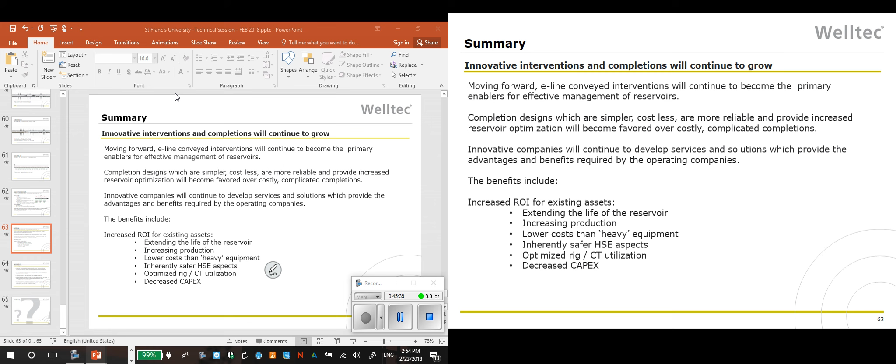Our company has been in operation for around 22 years, which by industry standards is very young. What you find is Chevron, Exxon, and some of the major corporations have done studies into technology and how accepting people are of it. Technology has to be about 20 to 30 years old before people really start to accept it, and we're just now getting past that 20-year point where people are readily accepting it as an everyday thing. So as time goes on, you're going to see more and more opportunities like this.

And then we'll give you guys a little bit of career advice here. Basically, you can't really imagine what it's like. I mean, I could tell you a bunch of different stories, but you're not really going to fully understand it until you get there and realize what it's like.

First of all, you're going in with a degree. What that degree proves to somebody is that you're capable of being trained. That's it. It doesn't mean you're the best reservoir analyst in the world because you don't even know how to run the software or anything like that. It means you're capable of being trained, and you were able to go get a difficult degree and not quit.

Like a recruiter explained to me one time: your first job, they give you a pencil. You don't have a clipboard or a piece of paper or anything else. You're given your pencil and told to go do your job, and then after a while you get your clipboard and paper and all that. So it's always going to be a process. For example, when I went to work for Schlumberger, I'm a mechanical engineer, I know everything, of course, everything there is to know, right? The first thing they do is take you, the lowest guy on the totem pole, maybe with a high school education, who does the worst job ever, and you're his assistant. You're the lowest guy on the totem pole.

You're his assistant for 6 months, a year. And then after you've proven you can do the worst job in the company, you get to do the second worst job, then the third worst job. After a while you're able to develop yourself and get a cushy office job. Usually takes years. Even if you land a cool job with somebody like Shell or Chevron as a reservoir engineer in Dubai or something, they're going to make you go work on a rig for 2 months, 6 months, a year. You don't just get to kick back at your desk analyzing computer programs. Everybody has to do a little bit of time in the field, some more than others.